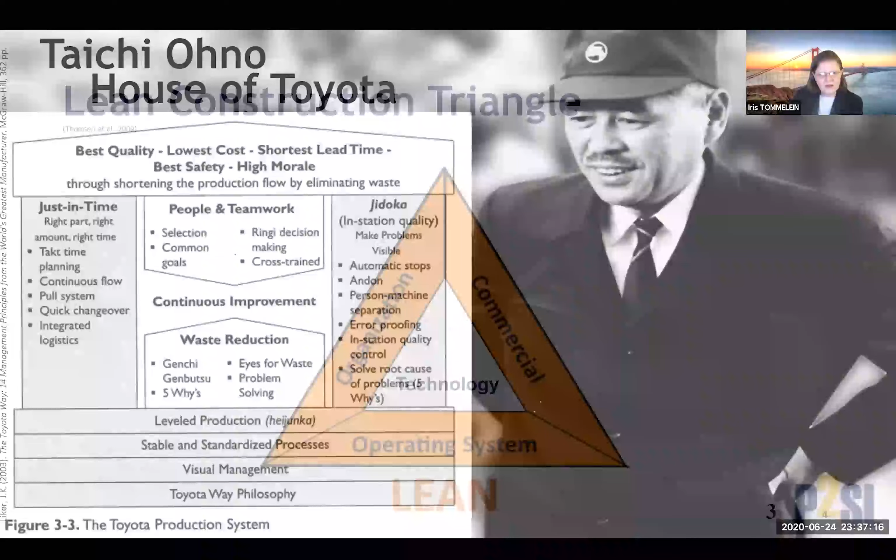So with that, I'd like to tie this to a framework that you all probably have seen many times before. It's the House of Toyota, as we call it. This is really the lean production operating system that Toyota is using, and there are multiple parts and pieces to it. There are some fundamental principles that we need to adhere to at the bottom: level production, standardization, visual management, and philosophy at large.

There are two pillars: on the right, Jidoka, the fact that we want to make quality products. On the left is the just-in-time pillar, the fact that we want to move forward and deliver our project. And then at the top are the goals. We want to have the best quality, lowest cost, shortest lead time, best safety, and high morale. In the middle, you will recognize people and teamwork, which is what we call the organization, and efforts related to continuous improvement, and of course, waste reduction.

I will focus today on a couple of parts of this House of Toyota in framing what I will be talking about. So let's start with waste reduction. We already had a very brief snippet from Dr. Alves as a sampler for today's presentation just a few minutes ago. The 7 wastes in lean production are very familiar to you: defects, inventory, waiting, overproduction, transport, motion, and extra processing.

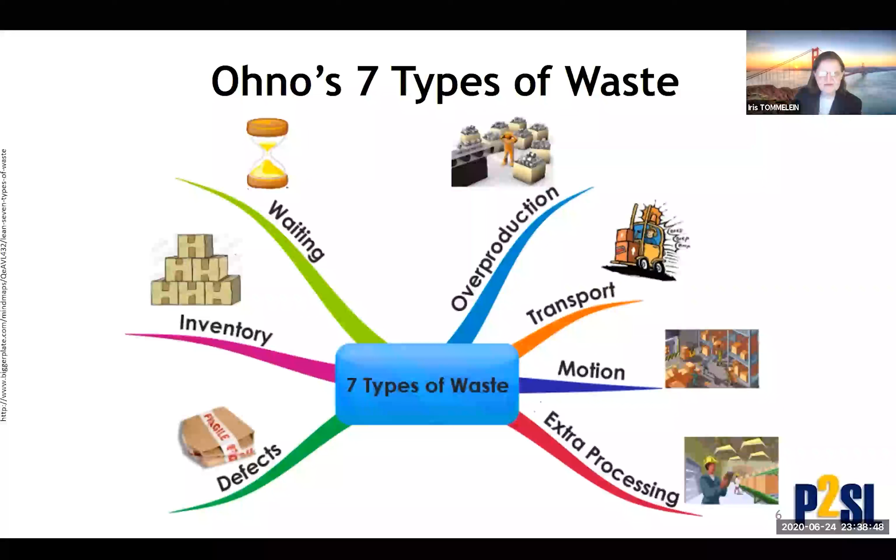But what does that mean for our construction industry? Well, here's an example. I went online looking for waste. I was looking for defective materials, and I found this random website, a blog that somebody was writing about their home reconstruction project. And the comment verbatim from the website said something like, well, we're lucky, at least our tile showed up. And thank goodness, only 1 box of tiles that we could tell from just moving them was damaged during shipping. I'm glad I ordered 10% extra of everything.

Does that sound familiar to you? Many of you are in procurement. Do we have rules of thumb to order extra of everything just in case? I think it is a very common practice. And unfortunately, it is a reflection of the fact that we have many different kinds of waste in our production systems.

As the video also mentioned, I wanted to amplify that these 7 wastes are very much interrelated with one another. So if you have one waste, usually it causes other waste. So for example, if you have poor packaging for the materials, then chances are that some of your tiles are going to break. So you're going to have some actual defects as a result of it.

And therefore, you're going to order some extra materials, which now require, of course, extra shipping and extra packaging. And because you risk having some damaged materials, you're going to have to move more boxes than you had anticipated. And at the end of your job, you're probably going to have some extra materials because hopefully you wouldn't need the whole extra 10% that you ordered.

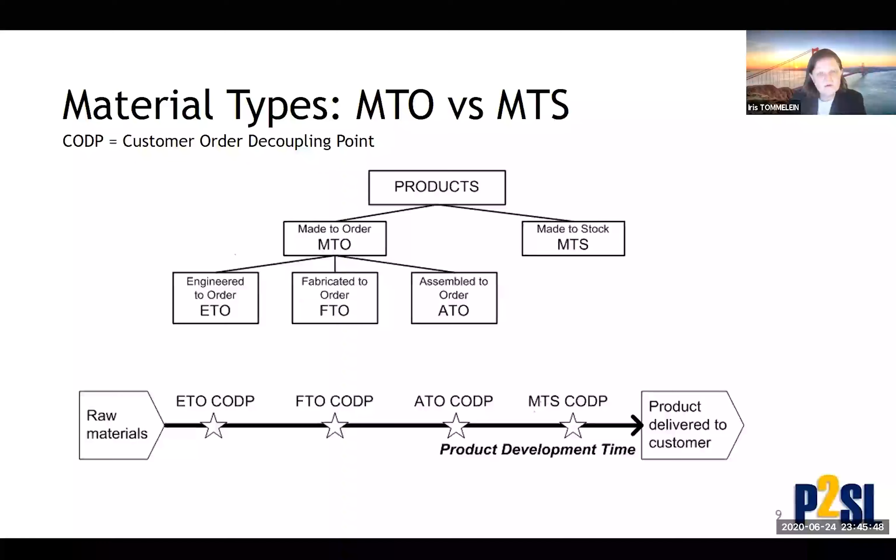So the way we do that is through product design, of course. If we have, for example, very simple components that easily snap together, then it's very fast to assemble a product to order. So we can reduce the lead time through product design. But quite importantly, we can also do it through process design. And that brings us to the left-hand side of the house of Toyota, where we have the just-in-time pillar.

The just-in-time pillar, by the way, for some people is called the go pillar. We want to move forward. The Jidoka pillar is the stop pillar. Stop, saying if you make a defective product, you better stop right away. Fix the product, fix the source of the defect so that it will never occur again. Spend your time there so that when you fix the problem, you can then move back to the left to the go pillar, the just-in-time pillar, and move ahead at the greatest speed your production system can.

So within the just-in-time pillar, we have a number of methods that we use: takt time planning, pull planning, integrated logistics, and I will highlight two of them in this context. So the first one has to do with the commodity type of materials, the made-to-stock type materials that are readily available on the supermarket shelves. Those materials, because they are generic, generally are supplied by manufacturers who will produce the product on forecast. They will anticipate what the customer demand is going to be. They will stock the shelves, and then they will wait for customers to arrive.

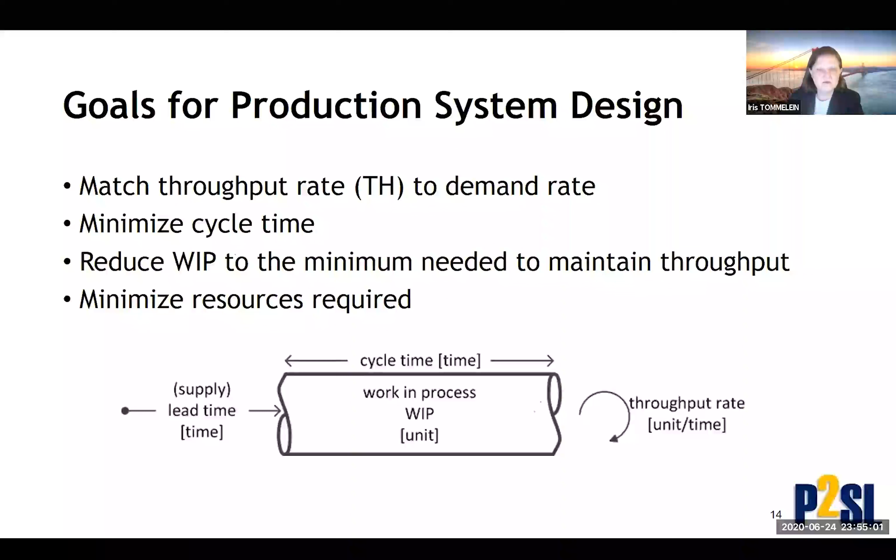The supply chains for non-commodity material, for the make-to-order materials, of course, are a little bit different because they require the customer to be involved to reach further upstream in the supply chain. And for that, we need to therefore manage these interactions, the interfaces between the design team, the fabrication team, and the contractors, the customers in this case. So the production system design for the more complex products looks more like this.

On the right-hand side, we have assemble. Before we get to assembling, we have to deliver materials. When we deliver materials, oftentimes we need to have a combination of many different materials available. We need to have pipes, we need to have pipe supports, we need to have nuts and bolts, for example.

So what we try to do in Lean is to alleviate what we call matching problems. Matching problems are problems where you may need multiple components, but you don't have enough of everything in order to be able to put your assembly together. And of course, if you don't have enough, you're going to have to either not do the work, or you're going to do some of the work and then have to come back sometime later. And that may be very punishing in terms of time and in terms of productivity on your project.

So if we can buffer, if we can alleviate the matching problem, we should take action to do that. And that is done by means of what we call kitting, which is putting multiple parts together. Sometimes it's called bagging and tagging. There's a lot of trade terms for the specific practice, but the idea is you try to make sure that you have all the parts you're going to need before you actually start the work on site.

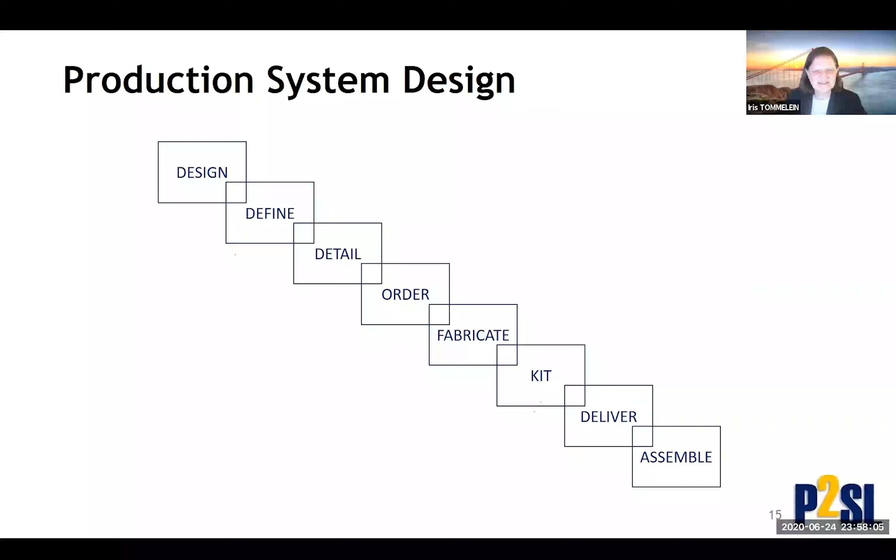And in that regard, there are many, many questions that will come up, starting as early as, what kind of product overall does your owner want to design? But when we break it down to smaller components, the materials that we're actually going to manage in the supply chain, we need to think early on as to whether a product is or is not designed, not just for ultimate use by the customer, but also whether it's designed for fabrication and assembly.

In terms of definition, we need to structure the work, right? So the product may be designed for fabrication and assembly, but who is going to perform which task? When are we going to perform these tasks? If we're going to store materials, what kind of inventories, buffers do we want, and where do we want them? Are we going to do the work on site? Are we going to do the work off site? That's what we call part of the definition step.

And the detailing step is to think about when exactly the components are going to be needed. Oftentimes, design is done in very large batches based on what's convenient for designers, based on what their software allows them to do. But the batches, the units of work that define design, are very much misaligned with the units of production. You may need to design a whole structural steel system, but when it comes to fabricating steel, you can only fabricate one component at a time.

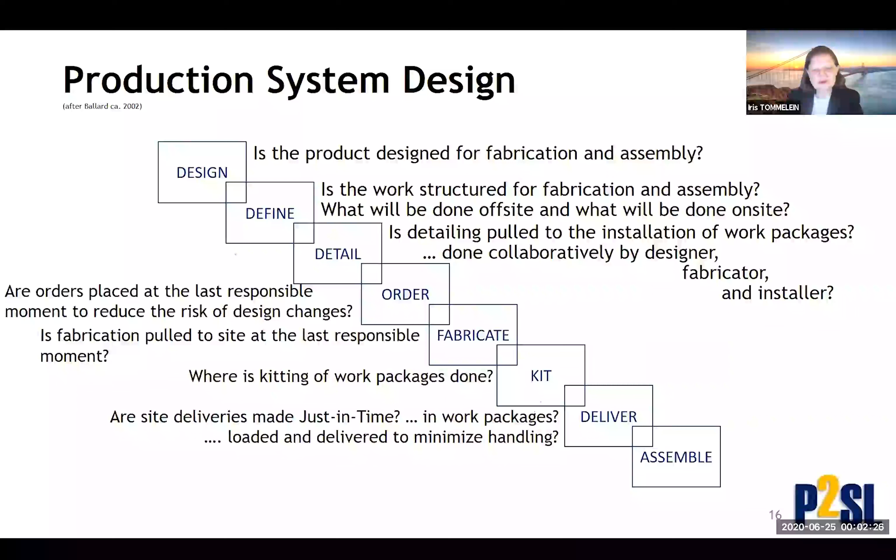We'd like to do one-piece handling. Unfortunately, many components get handled not just once or twice, but maybe 9 or 10 times. And so there's a lot of waste that we can possibly eliminate through better planning and through better production system design. So these are all the questions for you to maybe ponder on the projects that you are managing.

And from a Lean perspective, I think a couple of key questions further need to be asked. One is, have we identified where all the variability is in our system? And have we eliminated all the unwanted variability? So some variability is good, right? So if you design a piping system, it makes sense to have pipe of different diameters because there are different functional requirements to be met. And obviously that is good variability in our system.

But if the variability is not intentionally wanted, if it's not explicitly stated that there's value in that variability, then we talk about bad variability. And obviously bad variability by definition needs to be eradicated. So we need to spend time trying to eliminate as much of that as we can.

For any variability that remains at that point, because it takes time to reduce variability, for any variability that remains, then the question is, well, what kind of buffers are we going to use? Will it be time buffers? Will it be space buffers and inventory? Or will it be capacity buffers? And where are we going to put those buffers in our production systems?

And then can we size them? Can we make them large enough so they can actually take the blow, so to speak, when that variability manifests itself, take the blow so that we wouldn't have a detrimental impact on performance on our assembly processes on our construction sites. Key design criteria are to design assembly operations collaboratively, to safety, quality, time, and cost criteria.

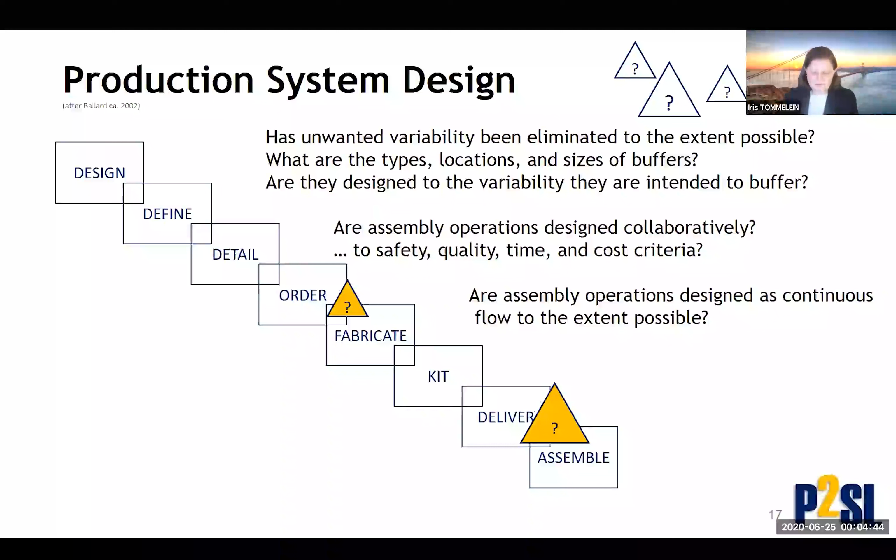So what does that look like for our engineer-to-order product? Think of reinforcing bar cages as engineer-to-order product. So the production system design will have, you know, all these different steps. I have not illustrated them here one by one, but the idea is in the upper left that you would have some collaborative planning where people bring expertise from different parts in the supply chain together.

So not just structural engineers, not just designers, but also fabricators, and also the rod busters, also the iron workers on site probably have very good insights into what is easy to build, what is hard to build, how injuries occur, and what they can do to prevent them. And sometimes it's a matter of adding perhaps a couple of pieces of rebar to prevent people from getting their fingers hurt on site. A couple of rebar pieces are not going to cost a lot of money, but they really improve the product and the process for installing that product.

Obviously, there's a lot of information technology nowadays that we are so fortunate to have that can help us with reaching shared understanding, capturing the details, capturing the lessons learned from all these different perspectives. And then we have very good tracking technologies also that can help us know exactly where inventory is in the pipeline, whether materials are coming or not coming, and whether they have been installed. And so with these technologies in place, we have a good sense as to where things are, right? We know the pipeline quite well.

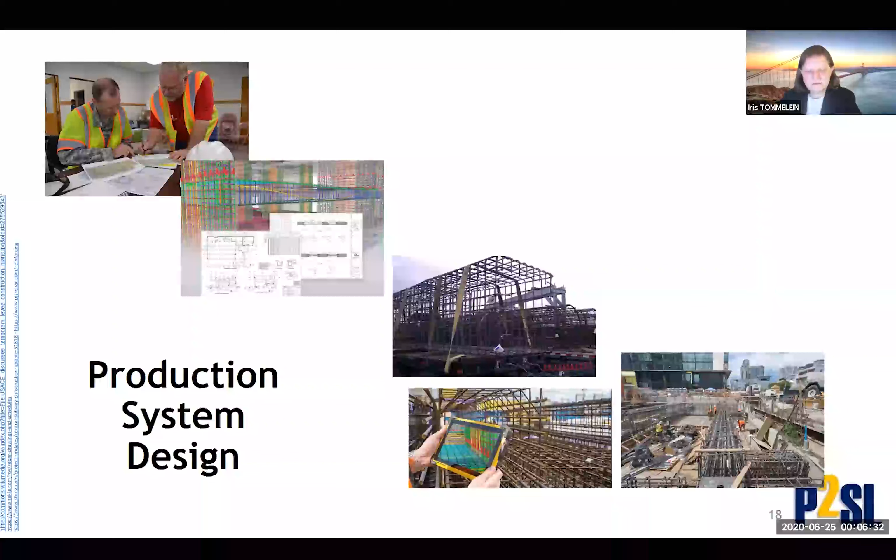And if we know the pipeline quite well, a technology that we can apply, a method that we can apply is what we call the CONWIP system. So CONWIP is a kind of pull system, as you can see it. It's similar to what I showed you before, where we had pull in vendor managed inventory.

But here the CONWIP starts from the construction sites and reaches all the way back into the design part. And in between is essentially a pipeline. And we want to streamline that pipeline. We want product to flow through that pipeline as efficiently as possible. And at the same time, we don't want the pipeline to burst because there's too much inventory in it.

And so a lot of supply chain management work for engineer-to-order products focuses on identifying the right batch sizes for installation and understanding installation rates, understanding demand rates at a construction site, and then feeding that information back up to the start of the pipeline.

And the idea of CONWIP is that if you can properly size the quantity of material that you allow to enter into the pipeline, then in the pipeline itself, everything will continue to flow. And you will get product out at the rate that you need to get it out in order to satisfy the construction needs. I mentioned CONWIP because it is a kind of pull mechanism. So, you know, I hope you already appreciate all the benefits of having pull in a system. What's nice about CONWIP is that it is actually much simpler.

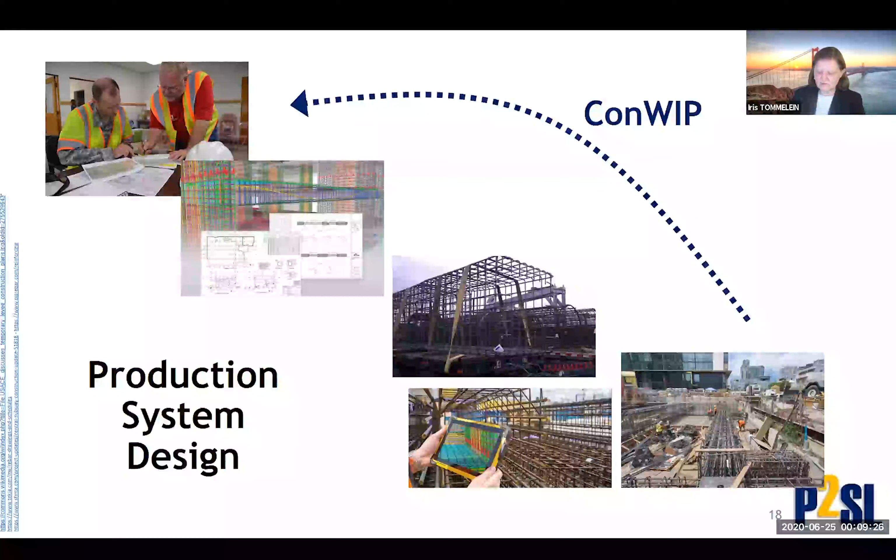And so that brings us back then to the house of Toyota, right? And the examples I provided have illustrated how we can do logistics and supply chain management using many of these principles that are in the house of Toyota. There are, of course, many other principles that will need to be implemented hand in hand with those, because, for example, for a product to flow, we need to make sure that the product that flows through our pipeline is going to be a quality product, that there are not going to be defects.

We cannot afford to synchronize the system with supply to match demand if supply is actually going to produce defective products, right? Then we're back to square one with our box of tiles, where we have to order more tile because our supply chain cannot be perfect. And in Lean, we always strive for perfection. So while we're lining up the supply chain, at the same time, we have to work in the other elements of the house of Toyota.

We have to work on the Jidoka pillar, build in mistake proofing, build in redundancy perhaps in designs to make sure that we can achieve quality, do root cause analysis if we run into problems, and perhaps do quality control in many more locations than we traditionally have, again, to prevent that we pass defective product to anyone else in the supply system.

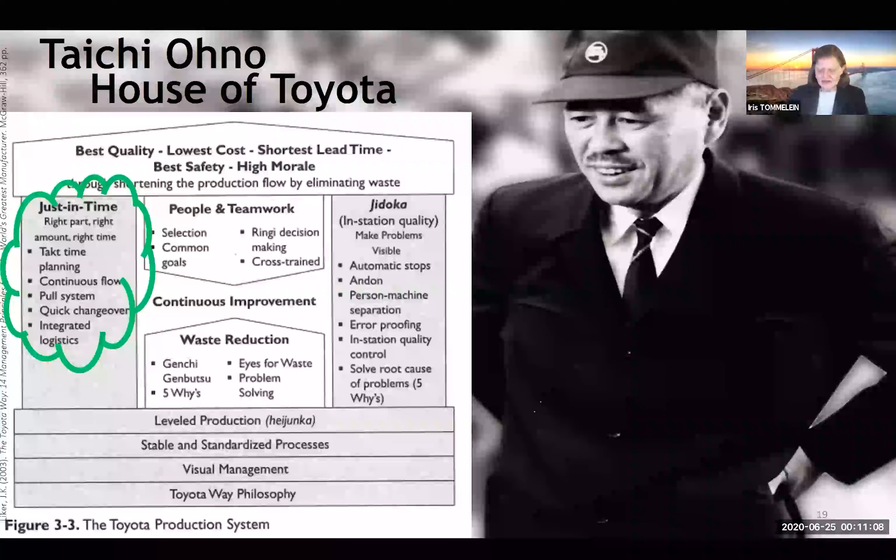So that is my presentation. I wanted to allow a little time for question and answer. I hope you have some questions about the concepts that I've introduced. So I'm all ears.

I think we can postpone the questions until the end. Oh, if you like, of course. Sure, that's fine. Whichever you want to do. Okay. Then I'll just pass the baton. Thank you so much for the presentation. It's very nice. Thank you so much, Professor Tommelein. You're very welcome.